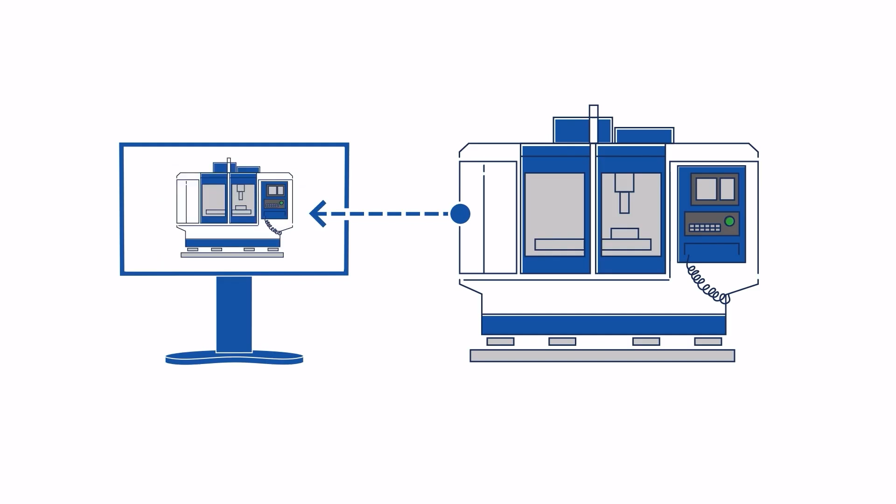And then kind of the next step from there is optimization, taking that G-code program with one single feed rate and putting in multiple feed rates on more lines in order to reduce cycle time and improve tool life.

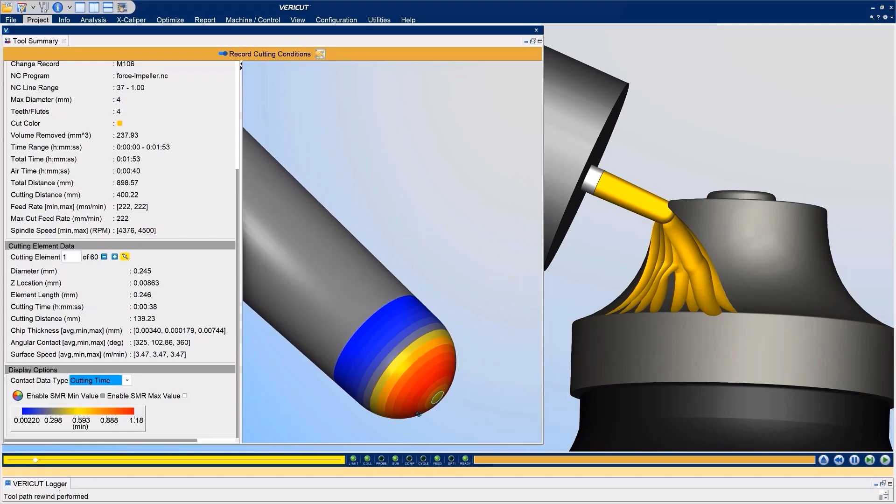I find a ton of value in that already. I may have even interrupted you. I got so excited about it, but I find value in that because as a programmer, I started, and I've said this story 100 times for people who watch our videos regularly, but I started line by line. You know how many times I put a decimal in the wrong spot or negative where it shouldn't have been? My X, Y's, and Z's going the wrong direction on my turning centers. For that verification that I'm not gonna crash, maybe I'm putting on my Captain Obvious cape right now, but that is so very helpful. Yep.

Yeah, and so customers have been using our product for over 35 years to do exactly what you said, find those one decimal place problems that you don't find out about until the machine crashes. And then sort of the next step from there after the optimization side of it, which is a standalone product, we get into machine monitoring.

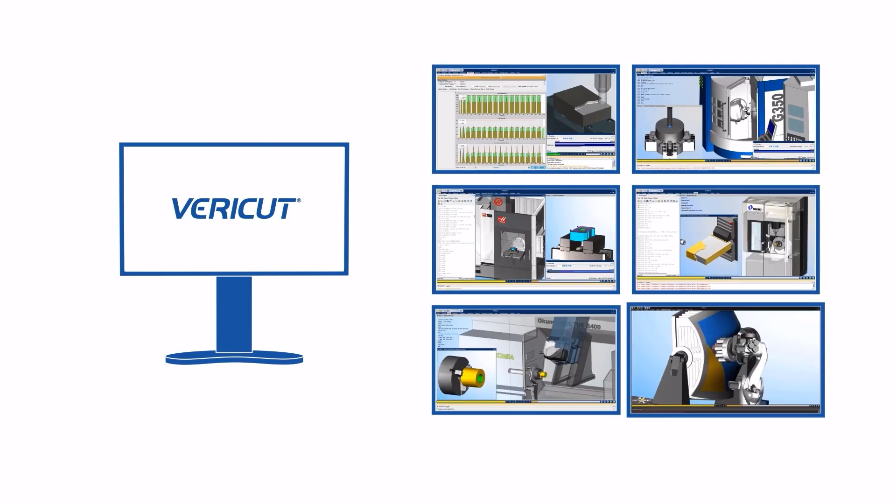So finding out how the machine is set up and how it compares back to the Vericut project so that if the operator makes changes on the shop floor or puts in the incorrect tool offset, we can compare it back and find out before you hit cycle start, hey, the machine isn't set the way the Vericut project is set up and there might be a problem, so the customer should look into it and fix whatever problem they see.

Can we dive a little deeper into the optimization side of things? I make a program, I'm running my part. Where does that optimization come in? Speeds, feeds, depth of cut? Where does it really maximize my potentials in a program that I had pre-written?

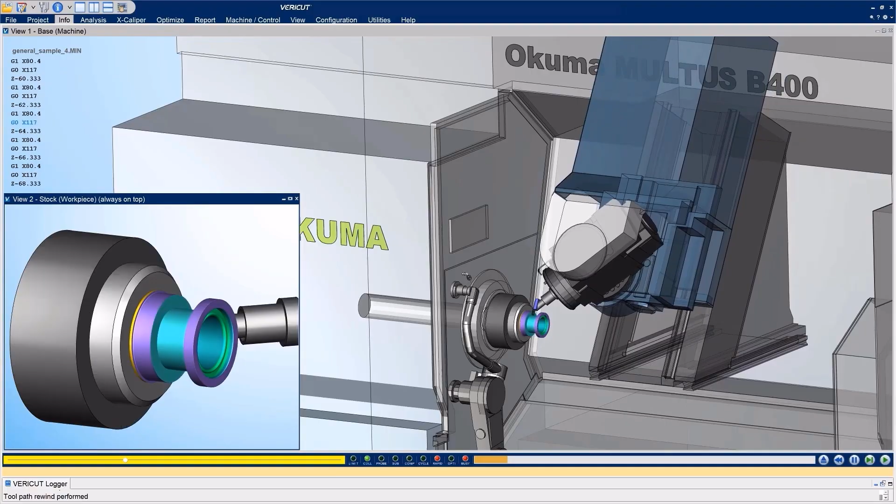Sure, so basically if the program's already on the shop floor running, the Vericut solution itself reads through that G-code program and it looks at how that tool is engaging with the type of material that you're machining. So if you're machining aluminum or you're machining Inconel or stainless steel, each one of those materials machines a little bit differently.

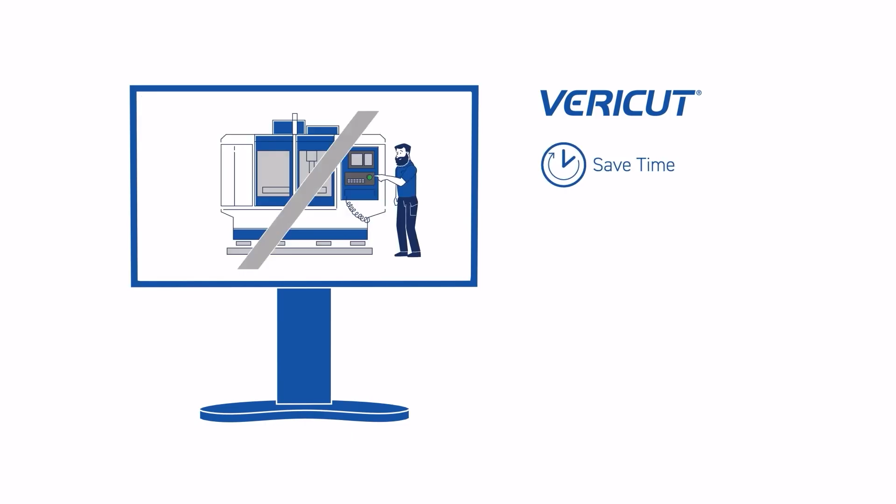And then Vericut looks at a 3D cut in time of how that tool is engaging with the material, and then slows down in areas where you might have deflection on the tool or tool breakage, and then speeds up in areas where you're chip thinning and you need to go faster in order to maintain a constant chip thickness and not wear out your tool or work harden the material that you're machining.

Yeah, makes sense. I'm happy you explained it that way, but when you were saying it, it obviously makes sense, right? So we have this beautiful gift called Vericut, and we're getting ready to give it, but we're gonna put a nice bow on it. So that bow is, how does that relationship work with Midwest Cam Solutions and GibbsCam?

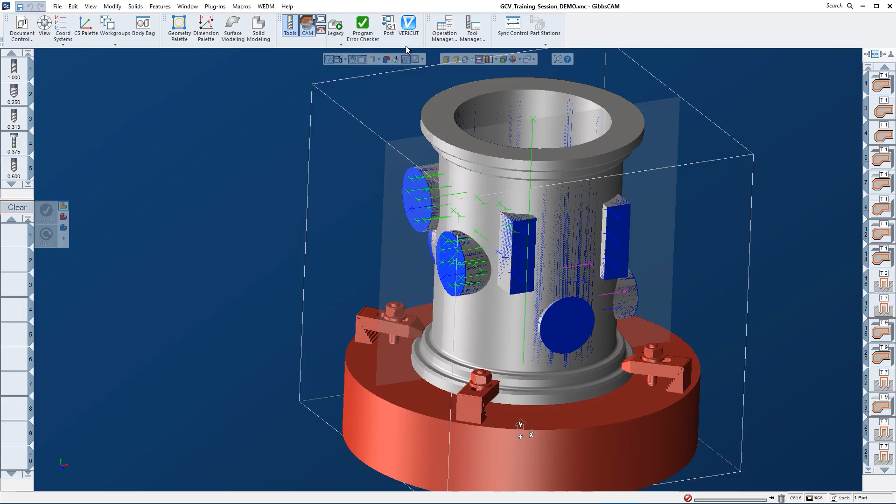Yeah, so the Midwest Cam group, they sell GibbsCam obviously into their area, and we partner up with them and their end users. So there's a direct interface from GibbsCam to Vericut, so clients can use Vericut to prove out a process like we talked about earlier before it gets out to the shop floor.

But their support for their customers is a lot like our support for our customers. You heard earlier with Darren that they get customers that call on a regular basis and they get help right away. We pride ourselves on the same type of support at Vericut for our end users.

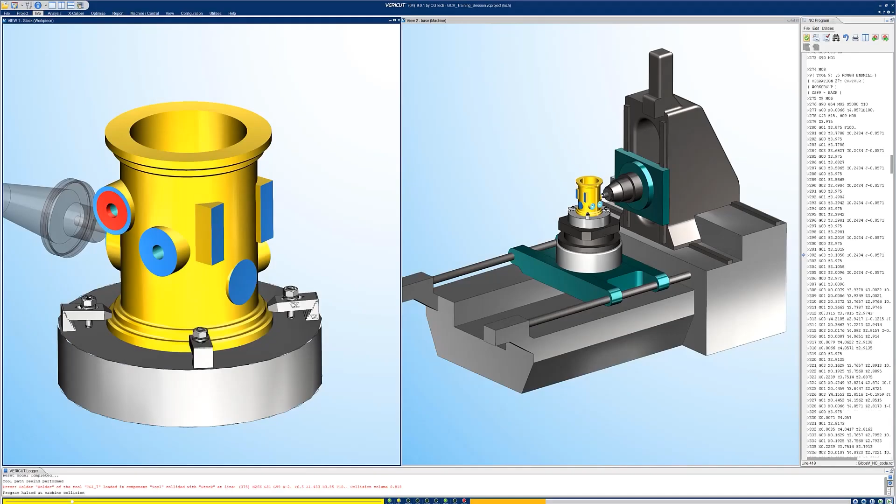Scott, as you may understand, at MTDCNC we travel the world doing interviews in machine shops all the time. I get a lot of answers and questions when the cameras are off about what works best for someone, right? And a lot of times I'll ask somebody about something that I believe to be incredibly significant, futuristic even, with all the AI going on, about being able to collect data, understand machines, and truly utilize our machine shops to the highest capacity. And every time I ask a question like that, I'll follow it up with, are you supported in a way that helps you truly understand how that technology can be beneficial to you?

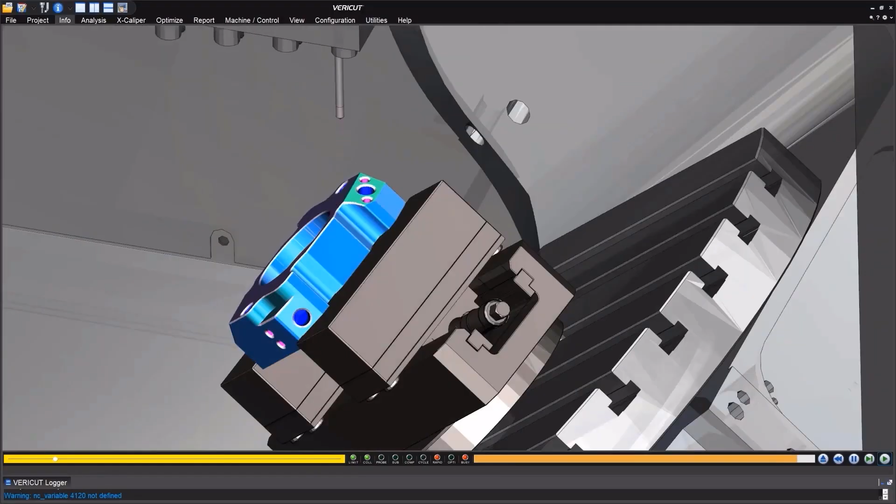And the difference to me between something good and something not so good is that communication in that service and support. Would you agree that that's the reason why you, and Midwest, and GibbsCam dedicate that service and support? When somebody gives you a call, you're there to answer those questions?

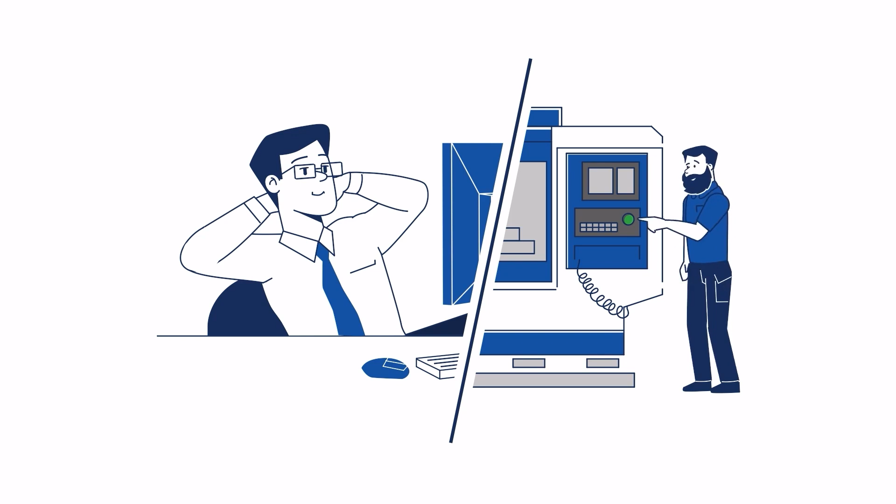Absolutely. Customers pay software maintenance on the product that they own, and they expect to be able to get support for that money, and we value our customers, and we think that support is super critical to them being successful and staying in business and being a long-term partnership.

Yeah, agreed, Scott. All my questions are done. You are off the hot seat. We can both get out of here and have lunch or whatever we want to do, but I really appreciate you sharing your time with us today.